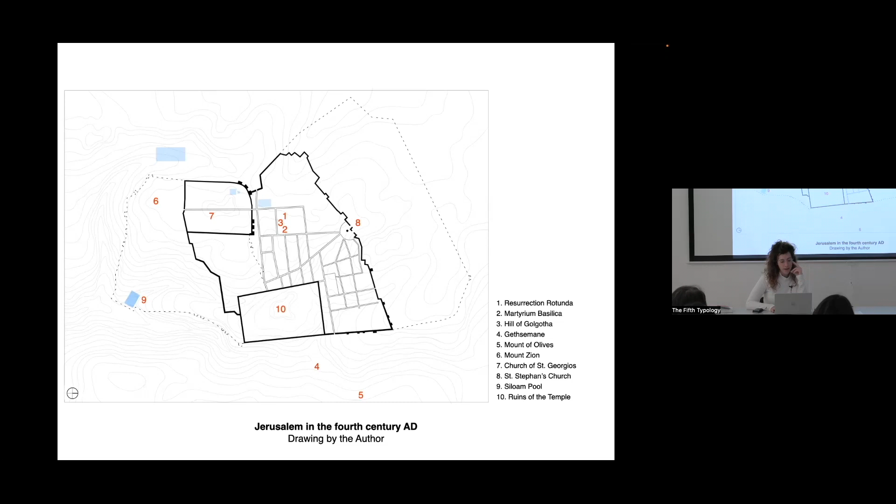But when Constantine arrived with his mother, they found the places where biblical events took place, and they marked each of these places with a monument, a church, or a chapel, essentially inventing these sacred spaces. Spaces that were allegorical in the minds of Christians until then now really became tangible in this new sacred territory. And the way that it was ritualized is that public processions would move between these places in Jerusalem where the life of Christ took place, in this very site-specific ritual.

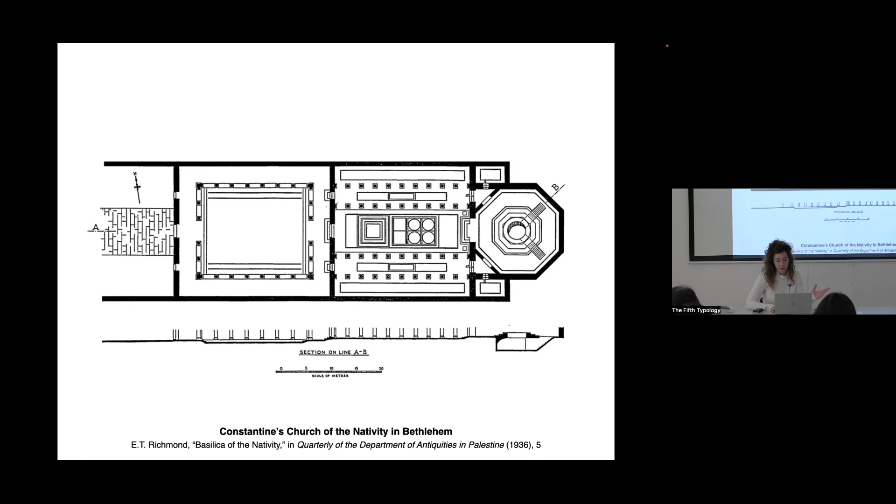Examples include: on Christmas, they would go to the site where Christ was born. On Pentecost, a celebration took place on the Mount of Olives, where he ascended to heaven. And on Easter, which is also now, so it's very apt, they visited the most theologically charged and spatially complex site, which was the Church of the Holy Sepulchre. And this church, this combination of the two types that you can already see here, was an enclosure of two separate buildings, which would really form, in my opinion, the archetype of Christian architecture.

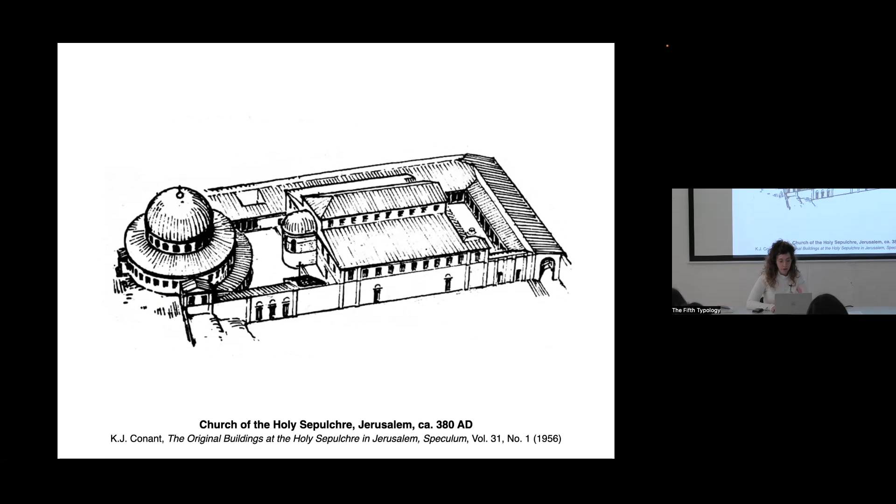So let's take a short tour. In terms of history and theology, it was built not on one, but on two biblical sites: the hill of the crucifixion of Christ, known as Golgotha or Calvary, and the stone tomb where Christ was buried and from which he was resurrected. Each of these sites was marked with a different space. So on the east side of the complex, closer to the street or to the Cardo, we see a wide basilica. And on the western end, separated by an atrium, was the freestanding Anastasis rotunda around the grave of Christ.

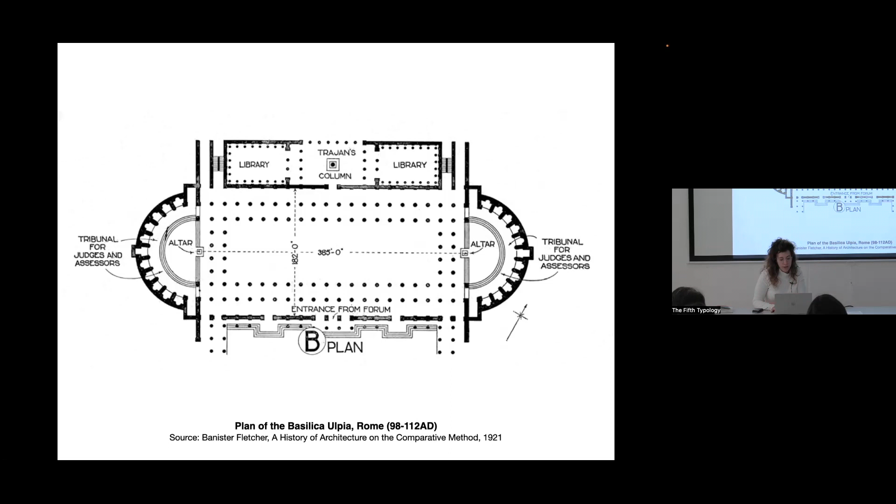Each of these types was born before 4th century Jerusalem, of course. The basilica was a civic Roman building used as a large hall for public gatherings, such as markets and courthouses. It was a utilitarian structure without a clear religious orientation, let's say. The only element creating a hierarchy was the tribunal on both ends, where the judge or emperor would sit. So when Christianity was made legal and public, Constantine adopted the basilica as the house for the church, which was great because it was a familiar type for public gathering. It was flexible in form and easy to build.

But the adjustment he made was to add this clear sense of orientation, stretching on an axis from the entrance to the apse, where the bishop was now sitting instead of the emperor. And the sense of axiality was reinforced by colonnades or arcades on both sides, which led the visitors both visually and physically from the entrance towards the apse or the altar. So this very horizontal space.

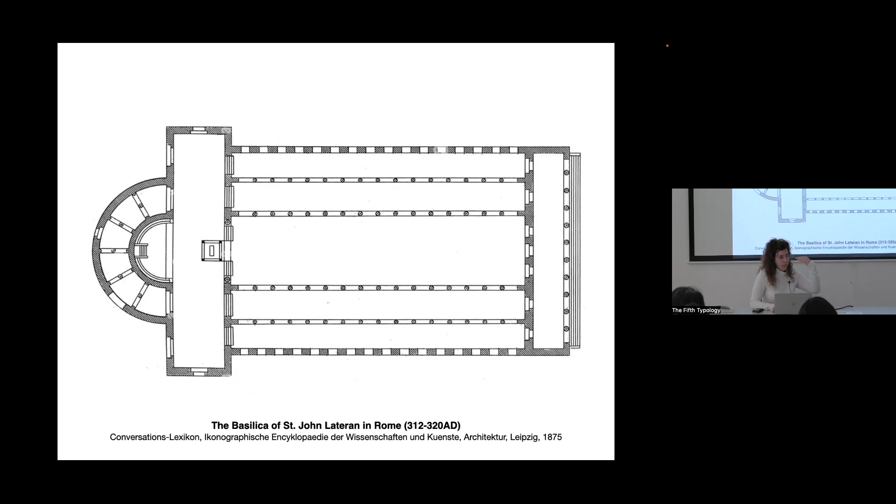In Jerusalem, Constantine wanted to build a monumental church to celebrate his own victory, and of course, the victory of Christianity over paganism. So he built this large hall with one nave and four aisles to host the huge crowds of pilgrims that would come to Jerusalem to celebrate the public nature of Christianity.

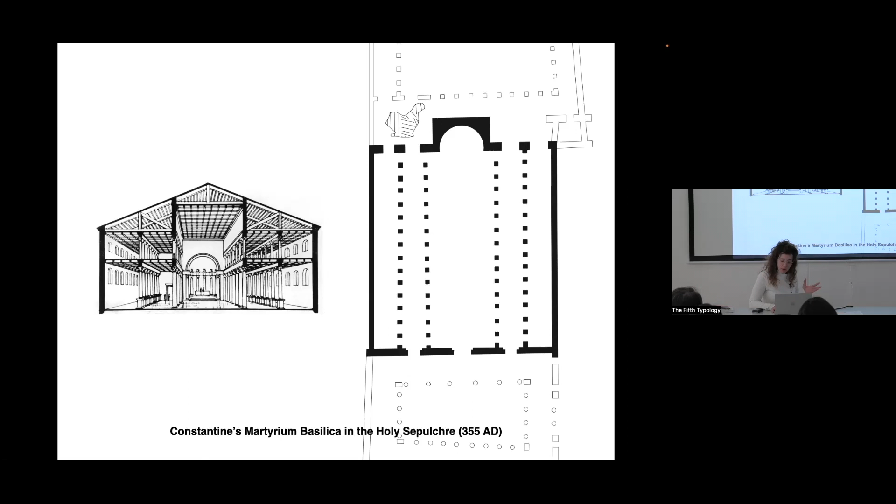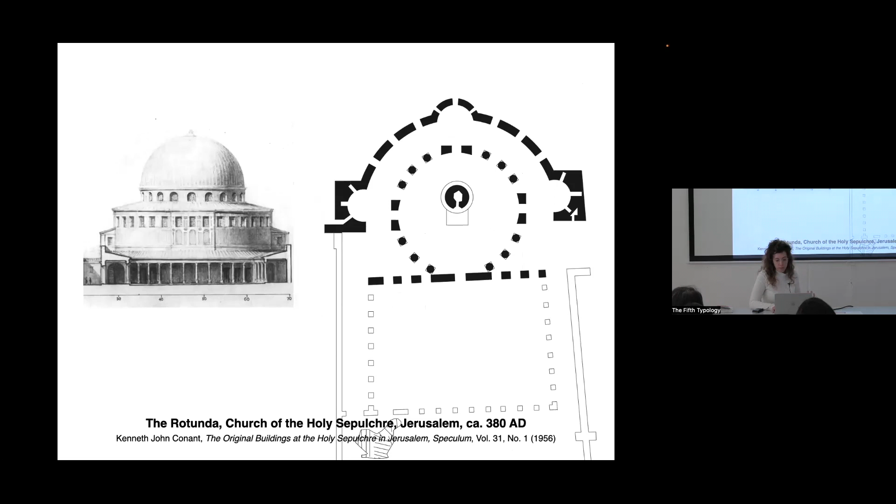But this church wasn't a regular one in Rome where you could just have public services. It was also a site for mourning the death of Christ. And for this reason, there was also the Rotunda element to commemorate the death and resurrection of the most important figure in the history of Christianity.

And this rotunda was modeled in typological terms after the pagan structures of the mausoleum or the Christian martyrium, which were basically monumental tombstones. In the case of paganism, for a deceased ruler, an emperor, and in Christianity, for martyrs who sacrificed their life for their religion.

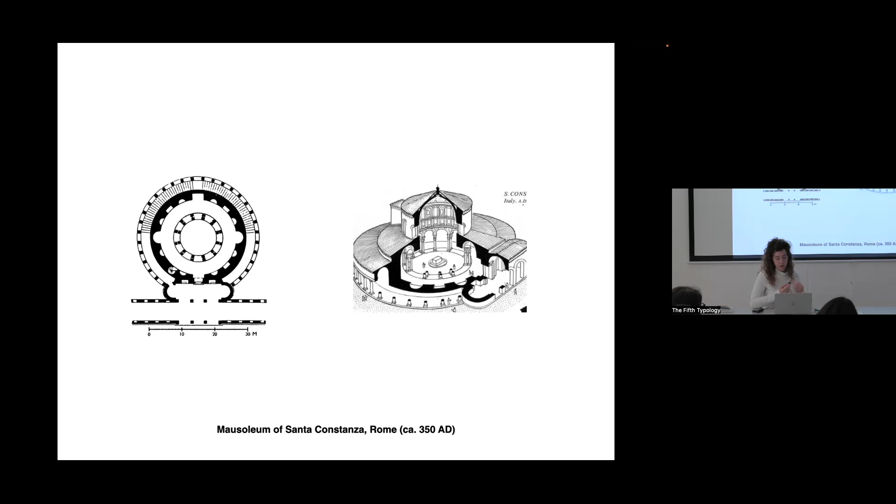And unlike the basilica, these were ritualized in a much more centrally oriented service. So as you can see, there's a double shell, and the inner circle was where these intimate events took place, and then the outer ring was used for circulation in and out. So in Jerusalem, it followed the same structure. You had the tomb of Christ in the middle, a ring of supports enclosing it, and another ring of columns where people would move.

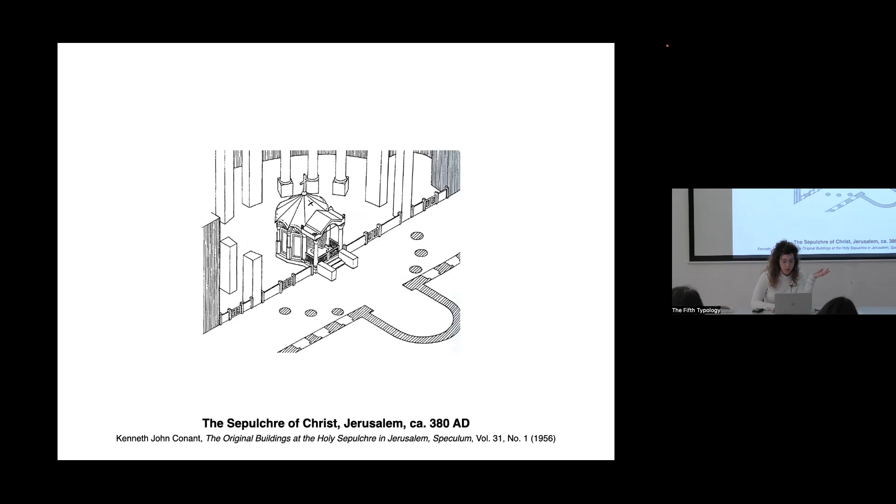And of course, this type was a merging of both the pagan mausoleum and the Christian martyrium, because Christ was both a deceased emperor who died as a god, let's say, but also a human who became the symbol of sacrifice. So this tension between the linear and the round reflects this dual character of the religion. It's both the victory of Christianity and this God who died on the cross, but it's also mourning this humble man, the miracle worker Christ that was buried on that spot.

And these two spaces are really opposite in some sense. You have the linear, you have the round, one which is much more horizontal: you come into a basilica and you look to the front. But when you're in a round rotunda space, you look up. It's much more vertical axis, which also means that in a basilica, you enact public group rituals, whereas in a rotunda, it's much more intimate, individual, silent, contemplative services. And it was really ritualized as one, as I'm now going to show you.

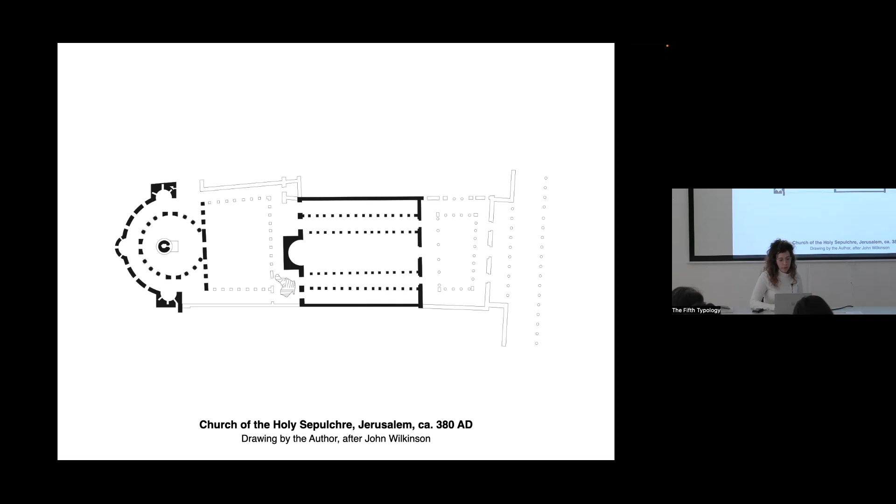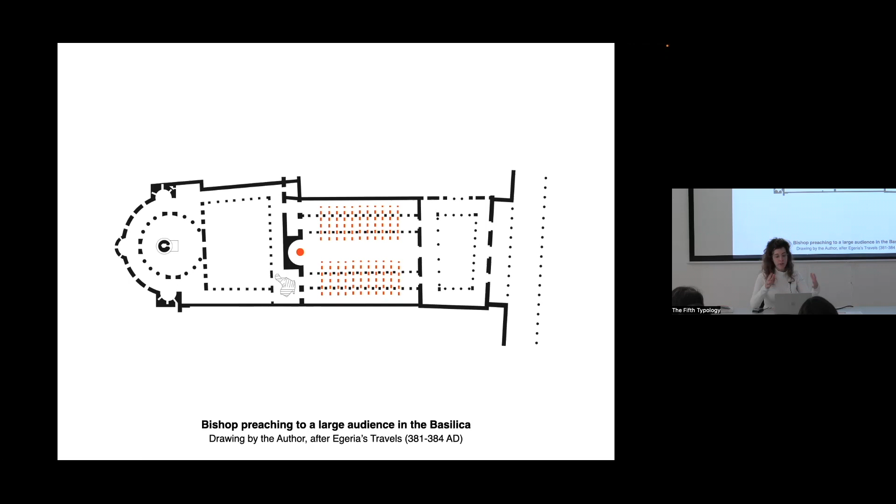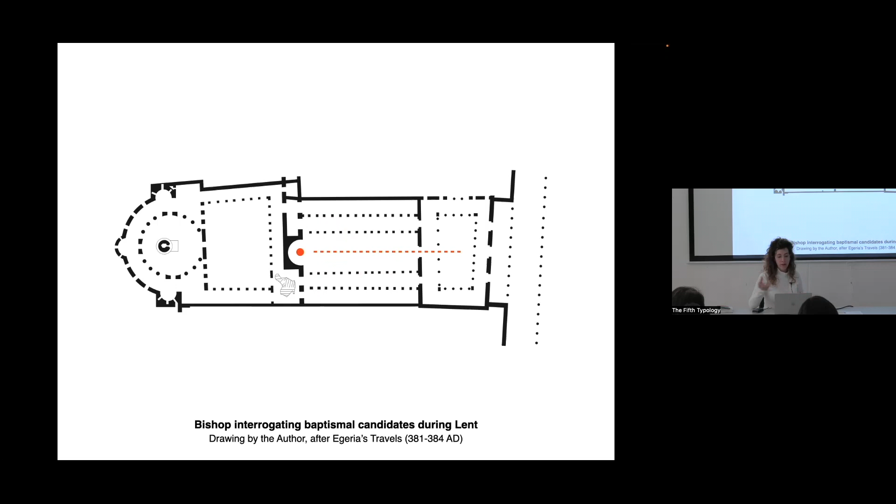So the diaries of a nun who traveled to Jerusalem in the 4th century reveal how these rituals took place. When preaching to an audience, the bishop was in the apse, conducting or even orchestrating the big crowds through the aisles and through the hierarchy of the basilica. During Lent, when he had to interrogate those who wanted to be baptized into the church, they stood in a line from the front atrium, from the cardo, all the way to the bishop that was waiting for them.

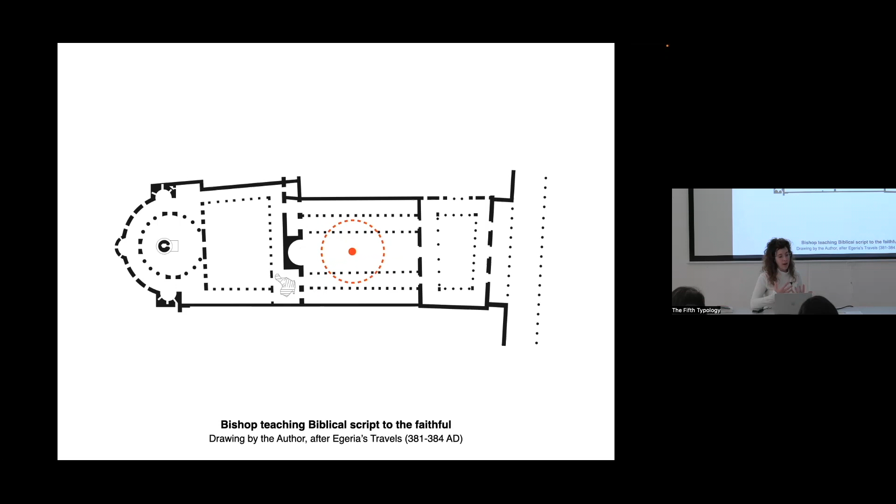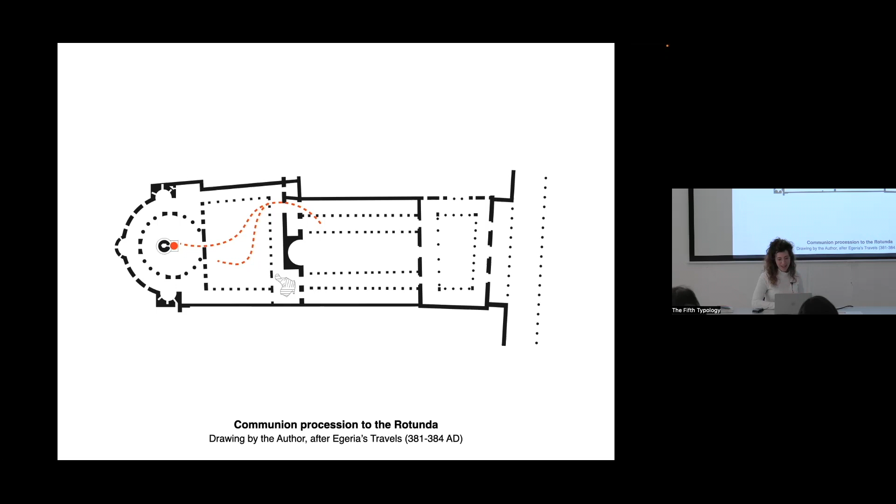But when he was teaching the Bible, it was a much more egalitarian setting where he moved in the center and they were sitting around him and they could speak about the Bible. When there was communion, there was a procession moving from the basilica to the courtyard, but only those already baptized could enter the round space, and those not yet officially members of the church had to wait outside, where they could hear the applause coming from within. They could hear some kind of climax happening inside, but they could not see the moment in which Christ was resurrected, which is what the bishop was enacting inside.

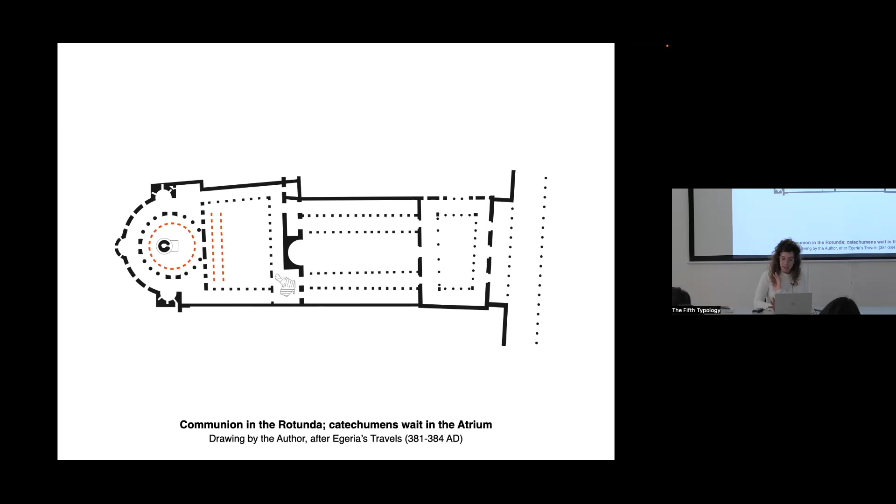And to me, what's interesting is that once you're inside the church and inside this round building, hierarchy no longer existed. You're all equal, at an equal distance and proximity to the tomb. So hierarchy was prominent in the basilica space, but no longer once you're inside.

So to me, what is at stake in the tension between the two spaces is the tension between hierarchy and universality, which is also embedded in the church itself, but is really embodied here spatially in the tension between the linear and the round types. In the basilica, we see the aisles, the columns, the arcade, the platform, and in the rotunda, this egalitarian space where the only axis is the vertical one.

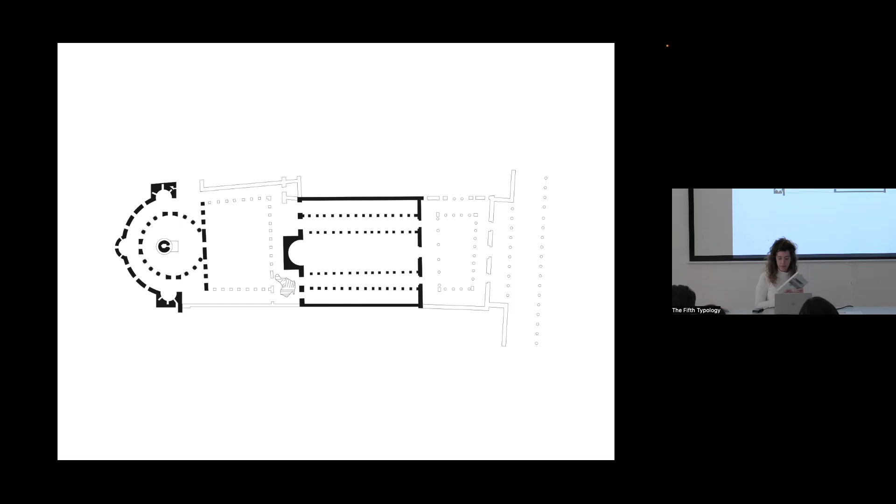And I understand this joint as type, and I want to read to you a quote from this book on type by Carlos Martí Arís. I hope I'm saying his name correctly. He says that elements and the relationship between them are the ingredients that make up type.

And this leads us to a new formulation of the definition of type, understood as a principle of organization by which a series of elements governed by specific relationships acquire a certain structure. So examining these rituals in Jerusalem show us that the juxtaposition of the linear and the round creates this condition where the bodies actually of the worshippers take part in this choreographed ritual that is deployed spatially to construct the

Jerusalem archetype. So in my research for my PhD, I looked for places where this archetype, this Jerusalem type, comes back again. And we see these examples from medieval Europe, from today's Germany, France, Italy, and the United Kingdom. And all these structures that I've researched, they're not just randomly following this type, but they each claim their own association to the city of Jerusalem and to the Holy Sepulchre.

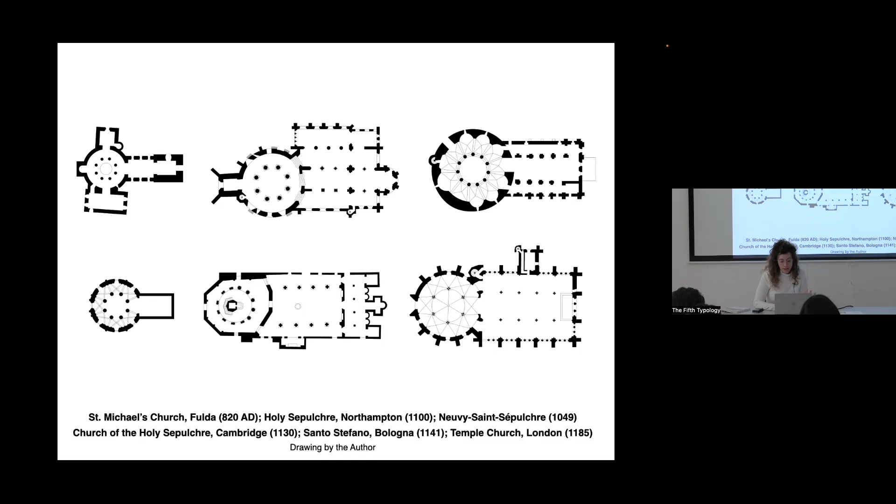And as you can see, they're all different from each other. And in a second, you'll see just how much they're different from each other. But they all follow this deep structure, this essential architecture that remains constant. As Marti Aris says, architectural type is defined by the presence of a formal constant that appears in diverse examples and is situated at the level of the form's deep structure.

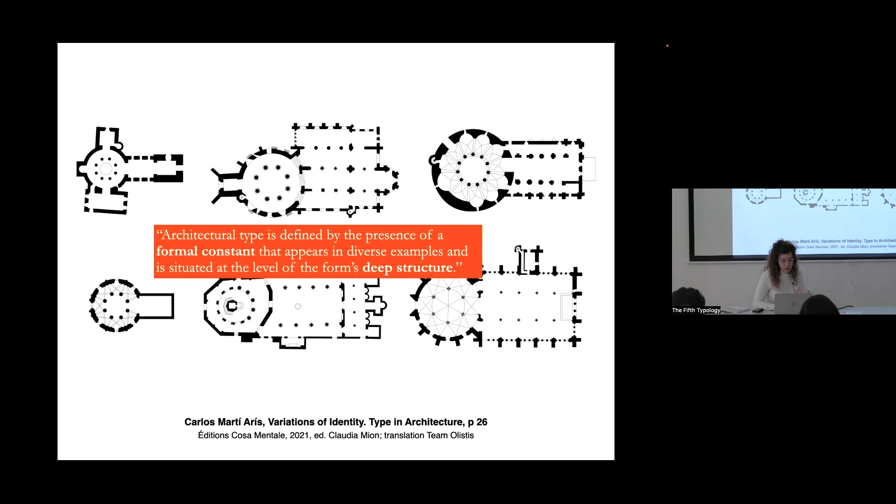So, for example, this is the Church of the Holy Sepulchre of Cambridge. Maybe some of you know it. It looks nothing like the church in Jerusalem, not in scale, the style, the urban enclosure, even the architectural elements are different. But the spatial composition at its core really follows this typological identity of the ones in Jerusalem and therefore is linked to it through this idea of type.

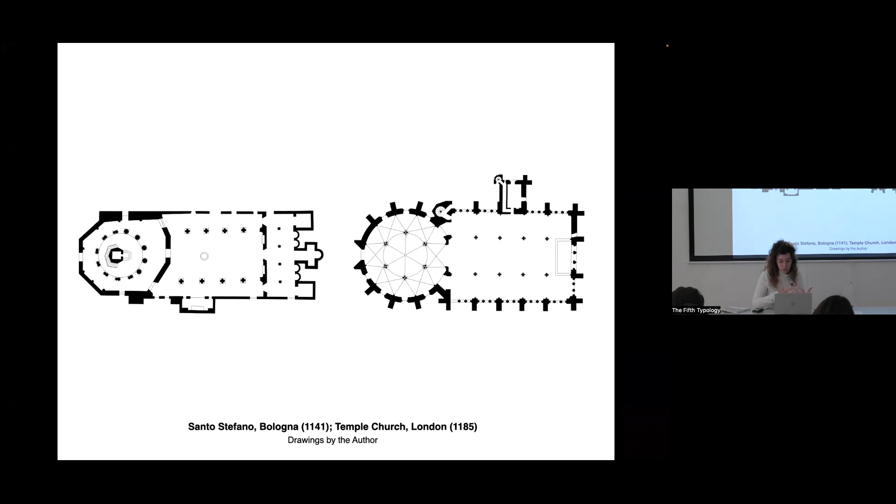So specifically, I will show you two 12th century examples from the Jerusalem archetypes that were built in Bologna and in London. And I chose these examples not because they're the most similar to Jerusalem. You'll actually see that they're quite different, but because they really construct this analogy to Jerusalem through rituals that spatialize this tension that I'm interested in. So the first one is the Church of Santo Stefano in Bologna. Maybe some of you know it as the Seven Churches of Bologna.

And it was built in the 12th century after a moment of crisis in the city, when two devastating events, an earthquake and a fire, destroyed many of the city's monuments and left it actually without a cathedral and therefore without kind of a clear civic orientation. And during this time, a miraculous manuscript appeared, which chronicled the life of Saint Petronius. He was apparently the bishop of Bologna in the 5th century.

And in this biography, found in the 12th century but written in the 5th century, it said that he traveled to Jerusalem, he measured the tomb of Christ with his own hands, and then came back to Bologna to build a replica with these measurements he took himself, and he was, of course, buried there and became the patron of the city of Bologna.

Now, in reality, the tomb itself doesn't look like the one in Jerusalem, at least not on the superficial level, let's say. As you see the materials, the scale, the proportions. But since we're interested here in the typological level, we can start to find links here. So a short tour of the place shows you that around the Holy Sepulchre, this tomb, there is an octagonal structure covered by a dome. It's encircled by a ring of 12 supports, creating actually a very narrow space around the tomb.

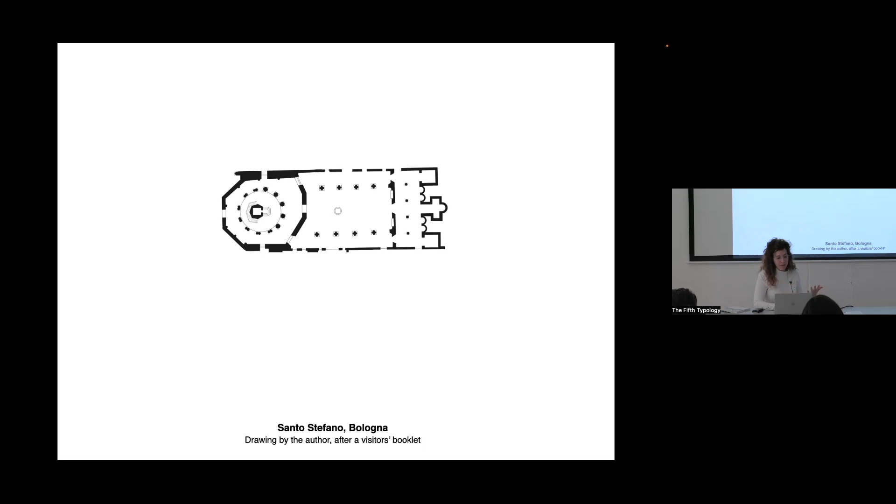And this structure is accessed through several doors, just like in Jerusalem, from a courtyard with arcades on both long sides, creating this kind of linear rhythm. To the other side, you have a shallow structure that terminates in 3 chapels, where various relics are enshrined, and the central one is actually cruciform in plan and contains an artificial mound, which is somehow supposed to emulate the Hill of Calvary where Christ was crucified. So this is a big complex.

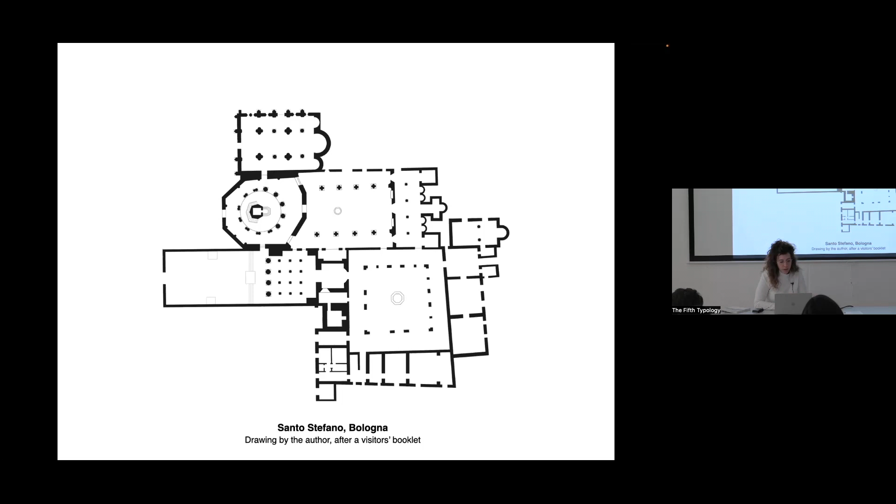You also have the Church of Giovanni Battista, a crypt, and a Benedictine cloister and another chapel, but I will focus for our purpose on the central composition. So essentially, we see 2 sites. We have the tomb of Saint Petronius, the patron of the city of Bologna, in the grave that he built for himself, just like Christ in Jerusalem.

And on the other side, we have this artificial hill where they built a cross, actually, to emulate where Christ was crucified. And of course, these two sites create the same tension, the same composition like in Jerusalem. In terms of rituals, on Good Friday, a replica of the cross was enclosed within the tomb of Saint Petronius, connecting his own death to the crucifixion of Christ.

And men and women could come and kind of have this intimate moment with the cross. On Easter morning, the monks were carrying candles and moved in a procession from the cloister to the chapels and along the axis of the courtyard to the domed octagon. And finally, there was a service of the adoration of the cross, where it was brought from the tomb to the hill, and worshippers can come and kiss the cross.

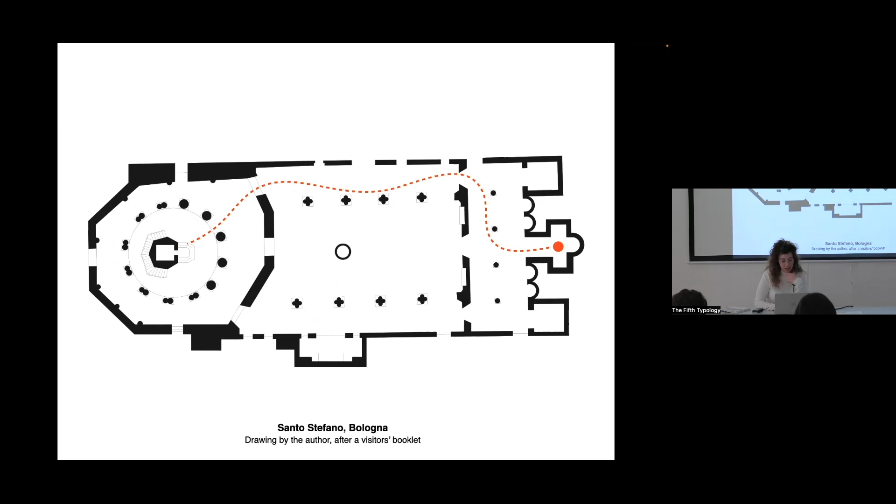So that is to say that in Bologna, the arcaded courtyard functioned as a roofless basilica, basically, with this linear rhythm and arcades on both sides, with this clear directionality that leads the faithful physically and visually towards the climax of the composition. In other words, we don't have a basilica or even a rotunda here, but it's still ritualized to create the same type.

And here I want to have another quote from Marti Aris, who says that type refers to a formal structure. It is not concerned by the physiognomic aspects of architecture. A type emerges when we recognize structural similarities between certain architectural objects, regardless of their differences at the most obvious superficial level. So again, the fact that we don't have any of these archetypical types here, let's say, doesn't matter, because the relationship between them is what remains.

So once we establish this as the Jerusalem type, we can understand that it really created a new Jerusalem in Bologna that changed the urban conditions entirely, basically branding Bologna as a proxy for the Holy City. And around a decade after it was completed, Bologna began this revival that lasted for a century and included the growth of the city from 23 to 100 hectares and the construction of those iconic towers we see today.

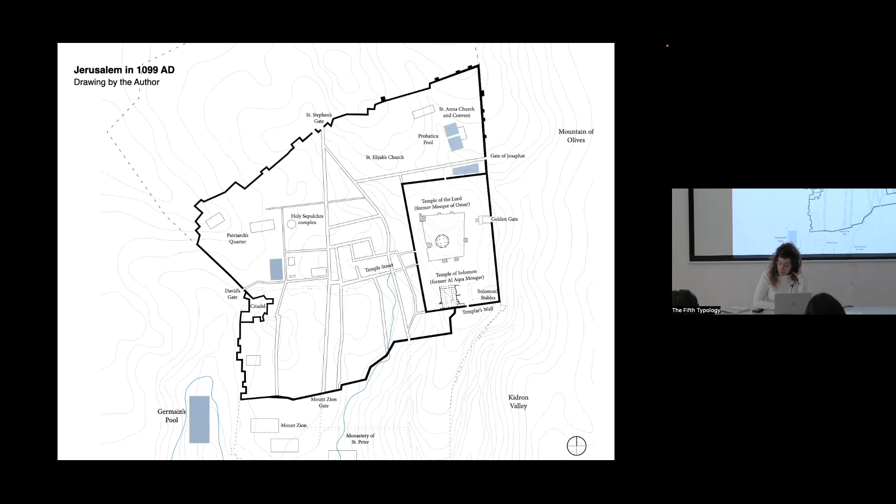So when the Crusaders captured Jerusalem, their focus was on not only reclaiming destroyed grounds of the Church of the Holy Sepulchre, but also to appropriate, actually, the Islamic shrines from Islam to Christianity. In this quite violent process, the Al-Aqsa Mosque was renamed the Temple of Solomon and was turned into an armory. And the octagonal Dome of the Rock was called the Temple of the Lord, where they built a chapel for St. James and for Mary.

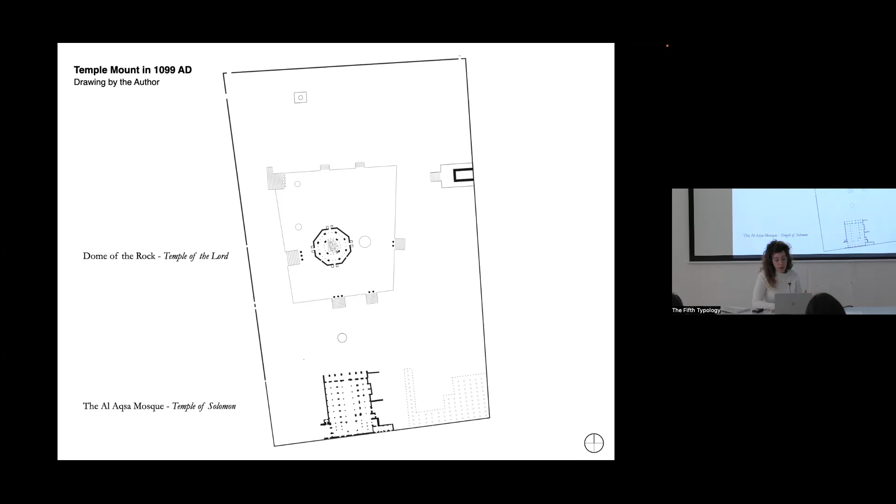And this repetitive use of the word temple was meant to draw a connection to the Jewish temple, which was built on the same site. It's part of their project to basically eliminate Islam and create a direct connection to the Jewish monarchic dynasty of King David and King Solomon.

And because they had the keys, because they had such a big role, they were extremely powerful in Jerusalem, but also across Europe. And essentially, they were bankers. They would loan money to kings. They would give manpower to the crusaders, and they realized that they need to store this capital in a site that would really signify their wealth and their possession of Jerusalem.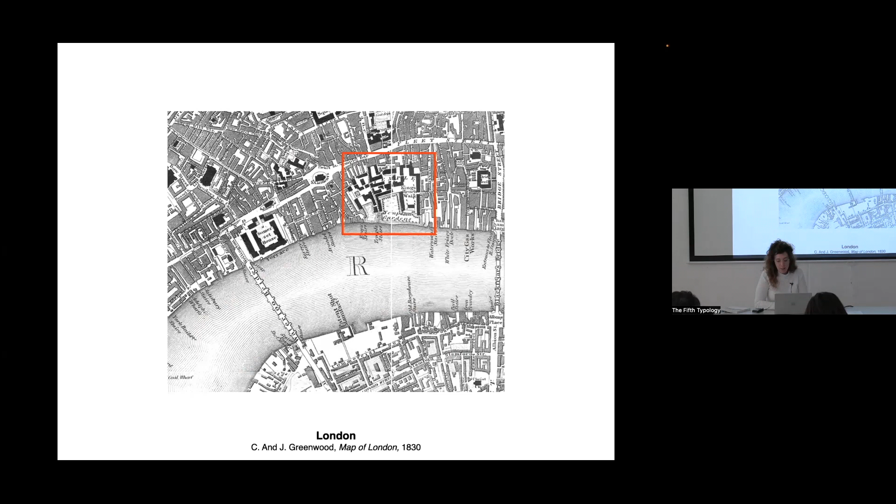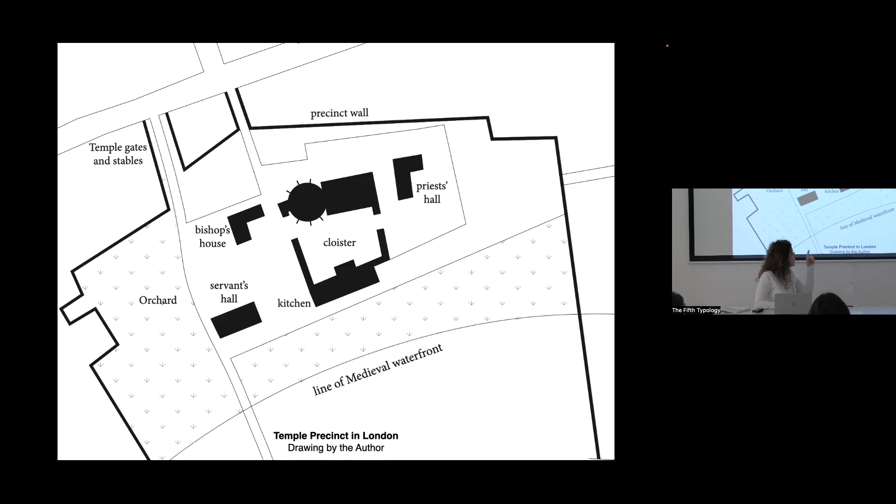So they arrived in London. They were given a site by King Henry II on the banks of the Thames, close to Holborn, and they built their precinct there as this kind of walled enclave with gardens, orchard, a cloister, and lodging for their knights, priests, and servants. And maybe you can already see our church in the middle. It was the focal point of the order. It was a place for mass. It was their treasury and a source of their revenue from pilgrims.

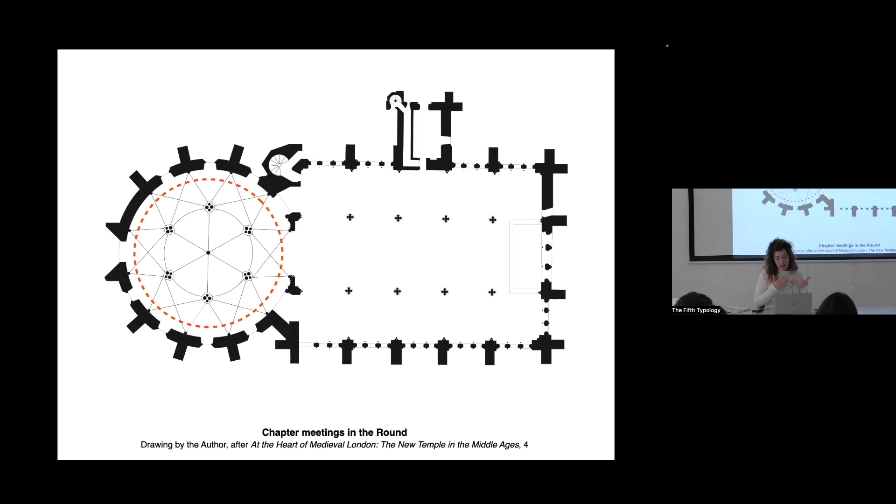And as you can see, it had two distinct spaces. One is called the round, which had this ring of 6 marble columns. And the choir that extended from it is more of like a hall church, with a central nave and 2 aisles. And the altar was on the eastern edge, actually. So in terms of rituals, the round was once again kind of atop the spatial hierarchy. And every Sunday, Christmas, Easter, and Pentecost, there was a chapter meeting of the knights, where they would gather, but sit across the walls, actually not in the inner ring, but on the outer ring, creating a kind of equality between all of them as they discuss their weekly concerns.

The initiation ceremonies, which were quite infamous for whatever they were doing, the novices were surrounded by their family and friends in the choir, but then moved in a procession into the round where only the novices were allowed to enter with the knights. And inside they were doing whatever they were doing, but also taking vows of poverty between God and the other brothers. So once again, we see this dynamic relationship between the two spaces, which allowed the rituals to be mobile and hierarchical at the same time.

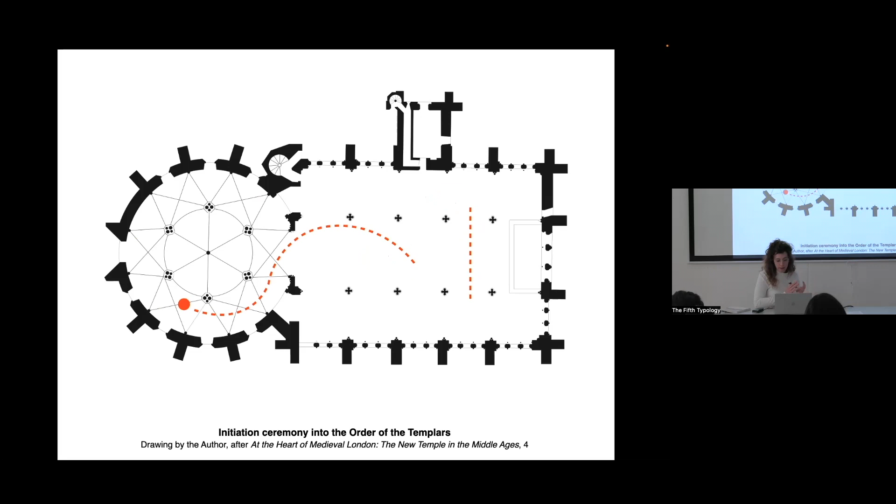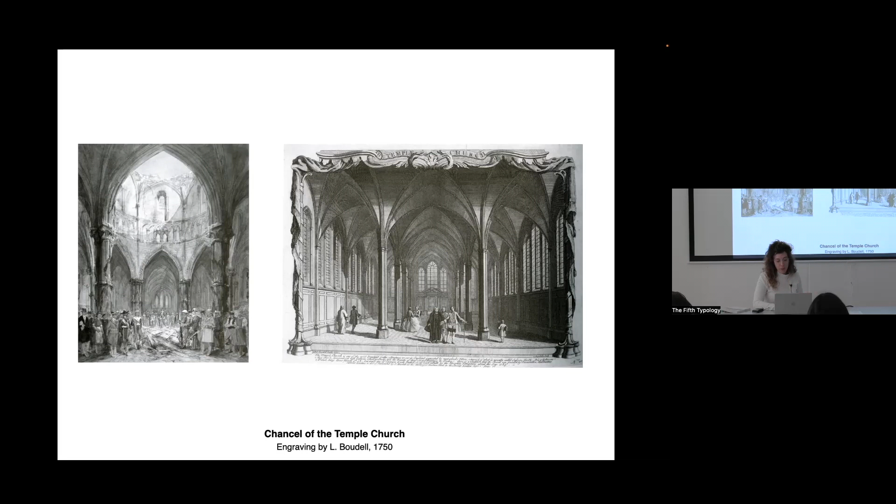But what's interesting to me about this church and the spatial setting is that the strong characteristics of each type were actually negated by the architecture. On the left, we see that the round did not even have a central element that would create a kind of centrifugal composition. And this makes sense because they were all sitting with their backs to the walls. They did not commemorate a single person, but actually there were a series of knights buried beneath the floor. And on the right, we see that the choir had these high windows, this flat ceiling, and very thin columns creating more of a field condition of diffused light without any clear linear hierarchy. So I think that the theological component in both spaces was also somehow negated in favor of this more, for lack of a better word, secular or institutional power.

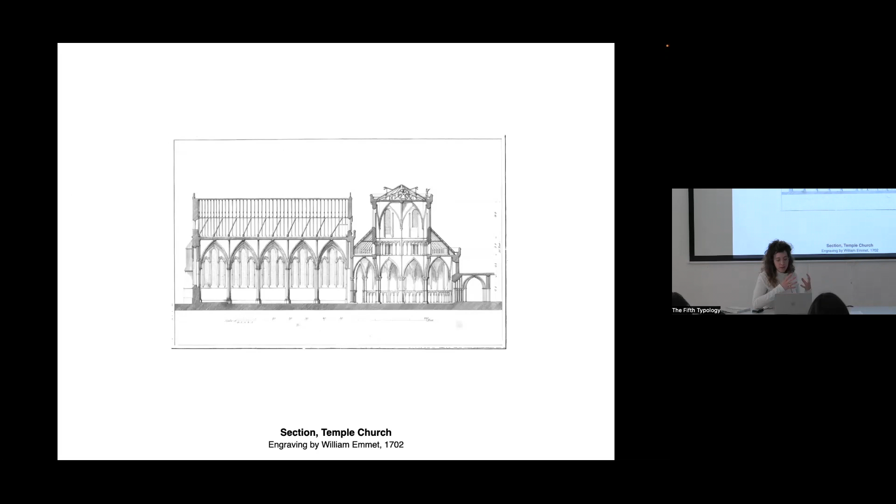And this continuity of spaces can also be seen in the marble columns that go from the choir into the round. So it's more of a fusion of the two elements, I would say. It's almost a harmony, which relieves this archetypical tension. And this condition is further exacerbated by the location of the entrance, which is actually not from the short side, but from the long side, the south, which doesn't construct this axial movement. Actually, when you come in, you're quite disoriented by where the service is, where the focal point is, let's say. And this ambivalence was made clear when the Eucharist was performed at the altar and the congregation had to turn their back to the round.

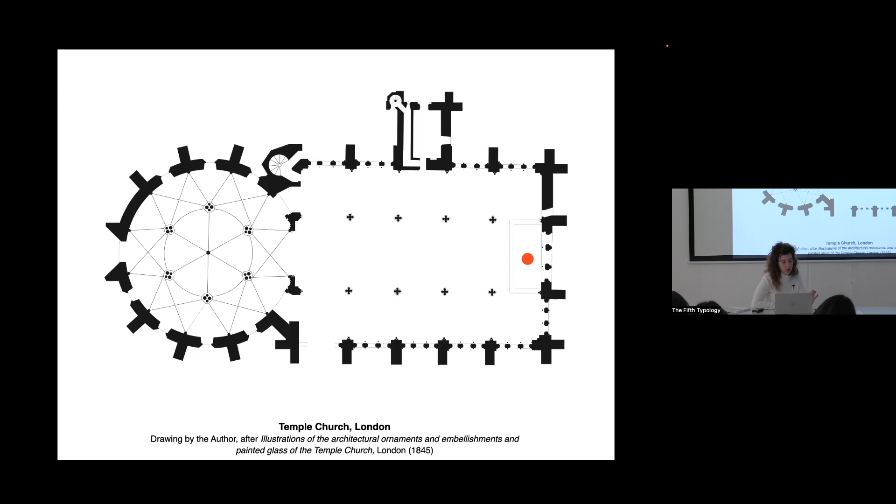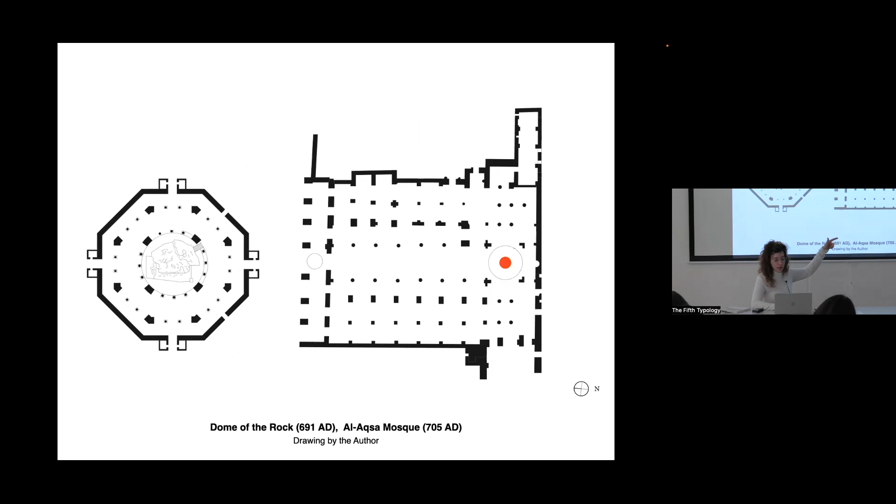And for me, this reversal of orientation and the diffusion of this field condition and this bipolar composition between the two sides is a typological variation on Jerusalem, but not on Christian Jerusalem, but actually on the Islamic Temple Mount. Because if you look at this, the Qibla in the Al-Aqsa Mosque was actually orienting Muslims towards Mecca, but away from the Dome of the Rock. And if you see it once more on the Temple Mount, they're indeed two separate structures, but are legible nonetheless as one sacred enclosure. And I find this incredibly interesting that despite wanting to bring the Jewish temple to London and to bypass Islamic history, they actually replicated the Islamic adaptation of the Christian type.

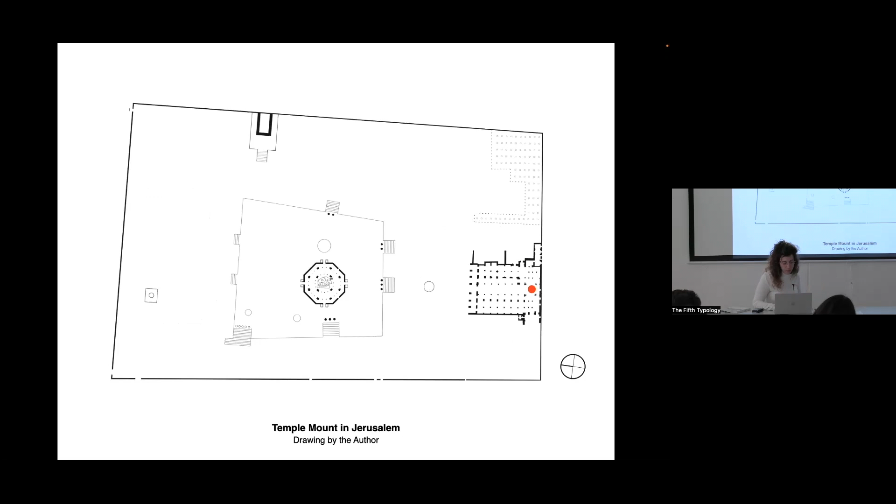And here we see it being ritualized and really appropriating the Muslim Temple Mount into Christianity. It meant that the religious setting was transported into the West, where the tension between the linear and the round was kind of softened by this diffused field condition of the mosque and the dual prayer orientation in the Haram al-Sharif.

And I think to me, this teaches us something about typological understanding. The type, and this is again from this book, the type is found in the very root of architecture and its constituent elements. This is why it always remains, always comes back under different manifestations. And the identity of architecture comes down to a formal constant perceived through endless example, each materializing in a different way. And in the case of the Templars, as you can see here, the church is basically just a fusion of these two elements and the not so monumental door on the south side.

The evolution of the Christian type and its interaction with Islam was for me no longer about theology, but about commodity in a way. And their desire to give form to their possession of Jerusalem created this icon, this archetype that appropriated Jerusalem more for its political rather than its spiritual charisma.

So to conclude, the two cases I showed you today from Bologna and London portray how this tension between the round and the linear was translated into 12th century Europe, where it played a crucial role in the shaping of the city, whether it's Bologna or London. And while none of these examples exhibit the typical Basilica and Rotunda combination, we can still understand their structure through the typological base that lies at their deep structure.